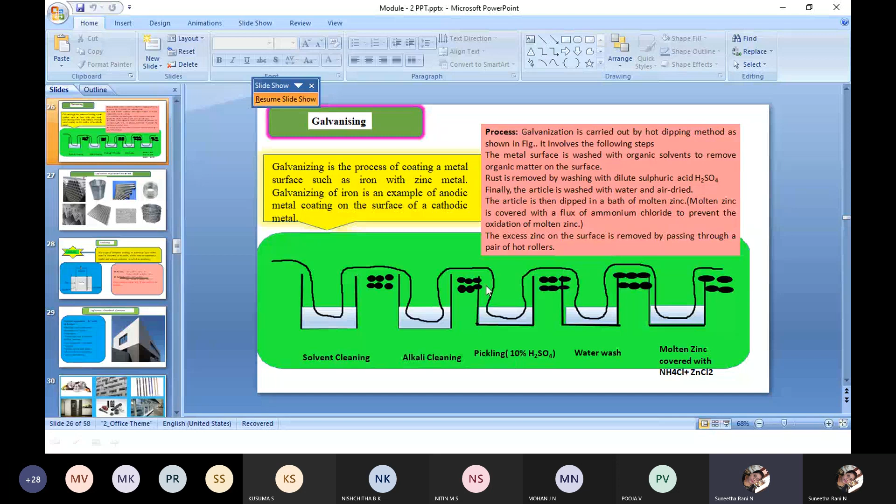Organic solvents, if you take in this beaker, will remove the oil, grease, and impurities present on this sheet, removing the dissolvable impurities in the container.

After removing the impurities here, pass the same sheet with the help of rollers into the other container. This container contains alkali solution, like sodium hydroxide or potassium hydroxide. This will remove the dissolvable impurities, oil and grease in the alkaline condition.

Next, it will pass to the next container, that is the pickling process. Pickling is a process in which you remove the undissolvable impurities by treating with concentrated H2SO4. The percentage we use is 10% dilute H2SO4.

After the pickling process, dissolving impurities and removing grease is done, pass the same sheet into the next container. It will take a water wash, and along with the water wash, it again takes...

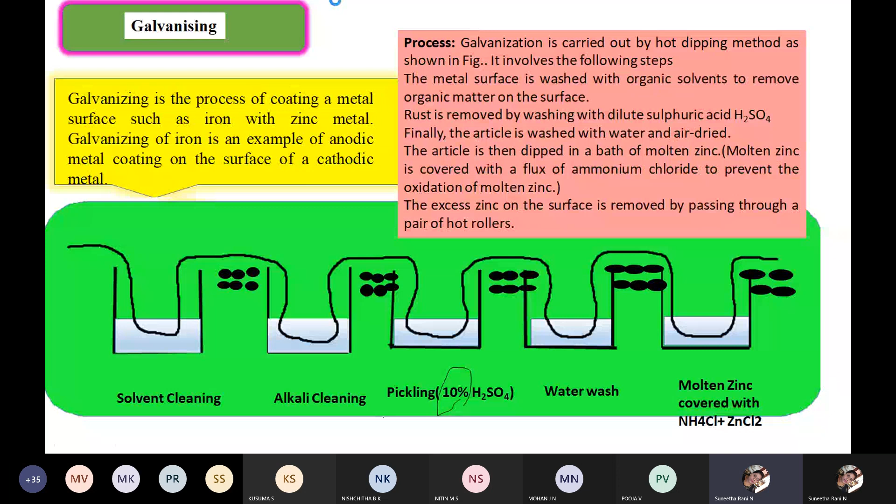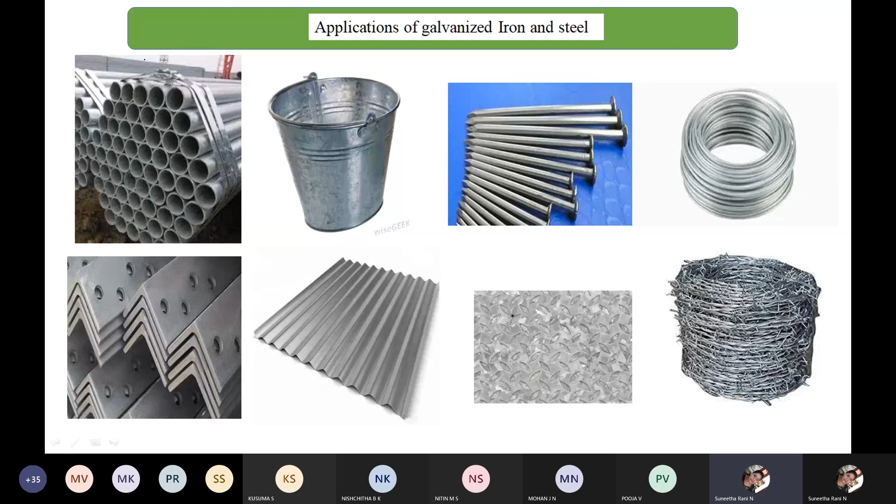It is a type of inorganic coating in which the top layer of the metal is converted into oxide, which acts as a protective barrier and reduces corrosion. This is called anodizing.

What this means is aluminium is a type of metal, and not only aluminium but different metals as well, is always ready to lose electrons. We use such a type of...

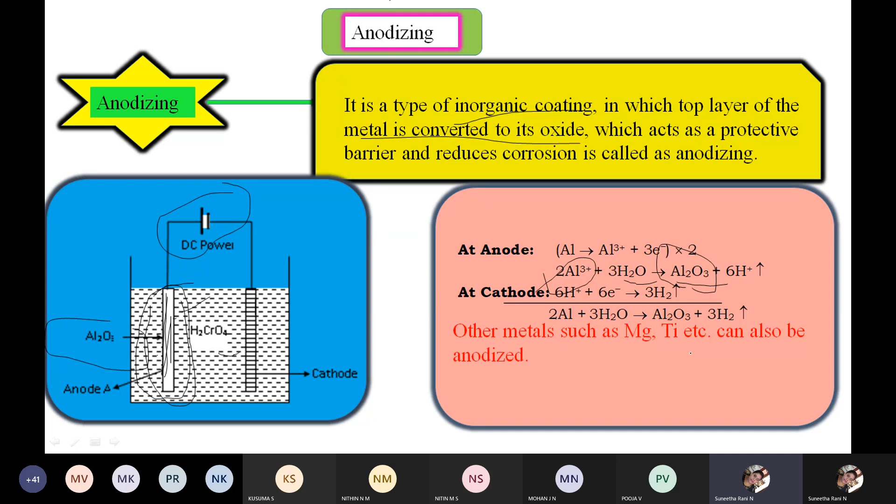Anodizing is nothing but an inorganic coating - coating an oxide layer of its own metal ion on the surface of the same metal by connecting to an external power supply, an external DC power supply. This process is called anodizing. The next is anodizing of aluminum.

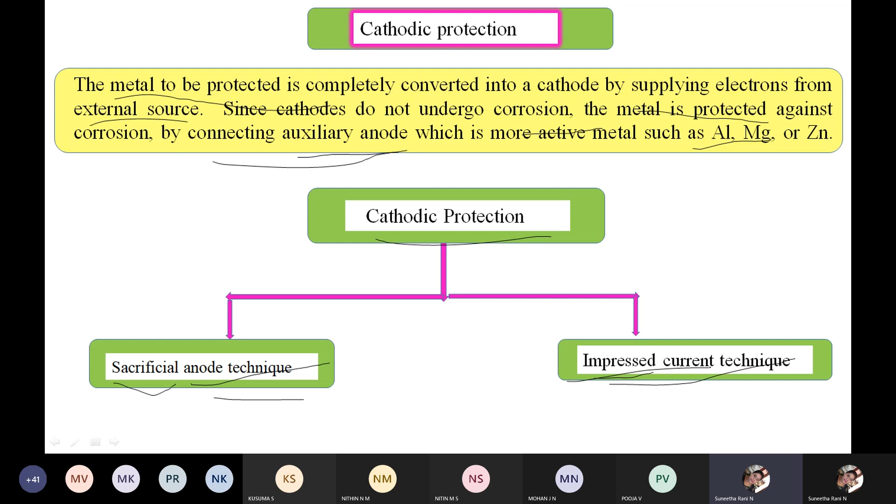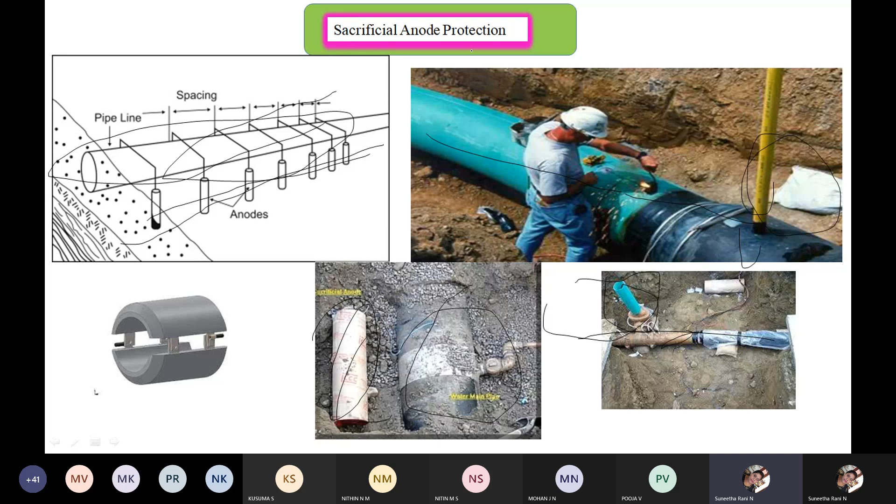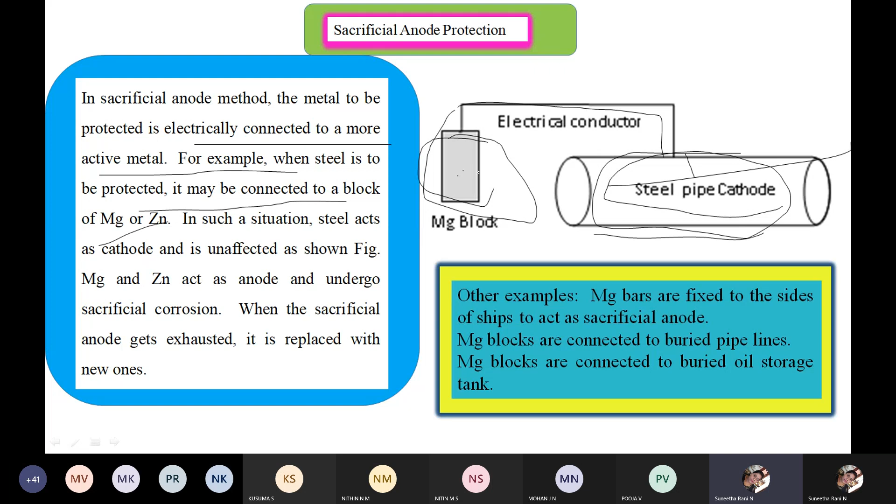So how is it done? Here, a steel pipeline is connected to a magnesium block. The magnesium block is an anode metal which sacrifices its anodic property, and it ceases, or is completely consumed, when connected to the pipe where the base metal needs to be protected. When connected, this pipe is protected by connecting to the magnesium block. This method is called the sacrificial anode method.

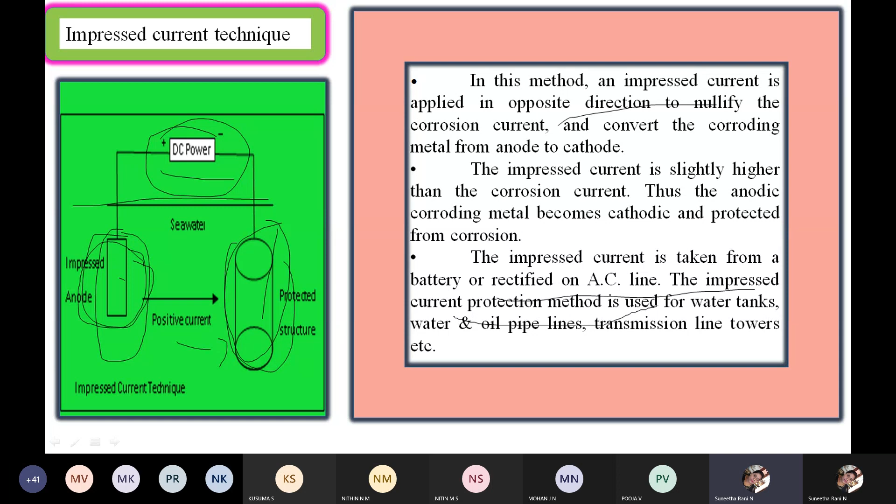The impressed current is taken from the battery, rectified AC, and AC lines. Impressed current protection method is used for water tanks.

So this is an example for how it is being connected in different forms, by connecting to the external power supply with the auxiliary anodes.

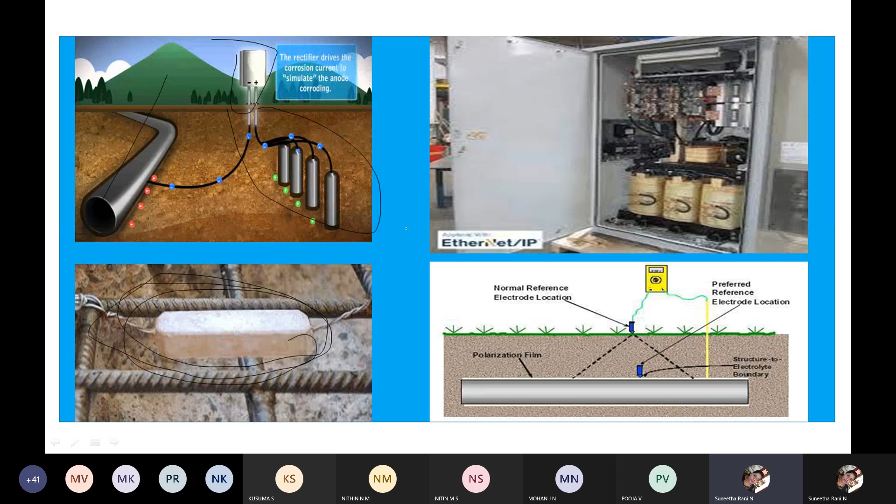First example, this is for pipe grounds for water connection. This can be connected here, using EtherNet/IP. This is protected - the pipe is connected to the battery and an auxiliary anode through it is connected, with rectifiers connected. Here also you can see it is connected to the magnesium block. This is how one metal is impressed over the other metal.

Understood? This completes the corrosion chapter. Any doubt here in the corrosion chapter? No, ma'am, no.

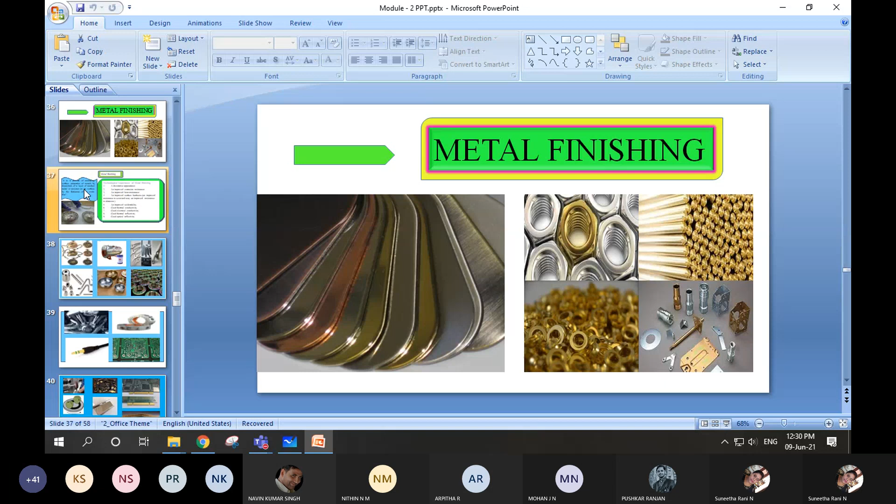Yes ma'am, electroplating we have studied. That means only definition or process? Even process also, ma'am, but not remembering. Not completely, right, only the process. So what is metal finishing?

Metal finishing is a process of modifying the surface properties of metals by deposition of a layer of another metal or polymer on its surface, by the formation of an oxide film. Remember this. It is the process of modifying surface properties of metals by deposition of a layer of another metal or polymer on its surface by formation of an oxide film.

So what it means is, this is the base metal. If you want to give it a fine structure, if you want to protect it from corrosion, we have to coat it with another metal. It can be a metal, or an alloy, or a polymer - anything we can protect the base metal with, anything we can plate. We will not say it is coated; in the plating process, it has been coated, it is a deposition. We are depositing another metal as just a layer on the surface of the base metal. Why we have to do this, technically how is it important?